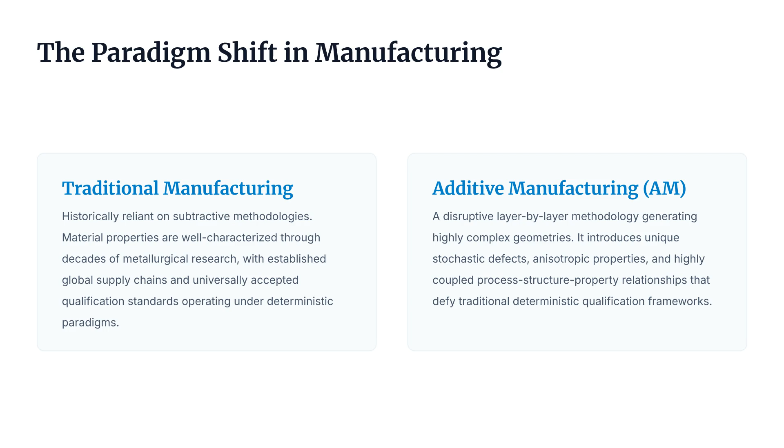In this first section, we provide an overview of the ecosystem and explore why establishing standardized pathways for additive manufacturing is an absolute imperative. Manufacturing is shifting. While traditional methods rely on well-characterized materials and deterministic standards, additive manufacturing introduces unique complexities like anisotropic properties and stochastic defects that defy conventional qualification frameworks.

Why do standards matter? They provide a common lexicon for global collaboration, act as a critical tool for risk mitigation, and serve as the foundation for regulatory compliance in sensitive industries. As the scientific consensus suggests, standards are not just guidelines. They are the essential bridge that transforms additive manufacturing from a laboratory novelty into a mature industrial reality.

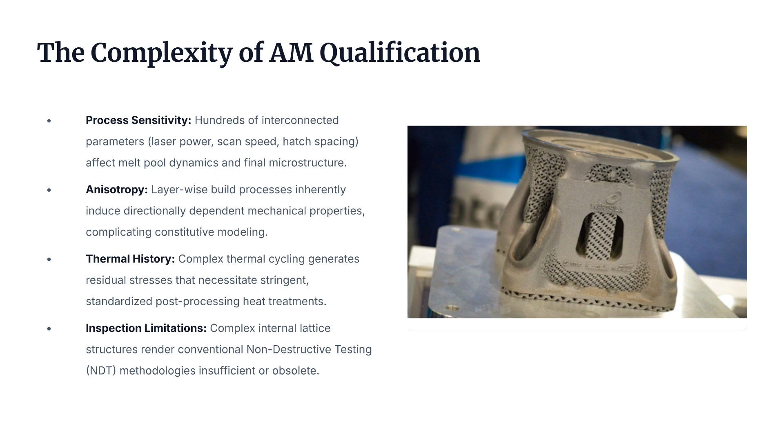Qualification in AM is complex. It involves managing process sensitivity, addressing anisotropic mechanical properties, navigating intricate thermal histories, and overcoming the limitations of current non-destructive testing methods. The evolution of these standards has been steady. From the formation of ASTM Committee F42 in 2009 and the establishment of ISO TC 261 in 2011, we now have over 100 active joint standards.

Moving to part 2 of this video, we will examine the core organizations that are drafting the critical blueprints for industrial additive manufacturing. ASTM International's F42 Committee is central to this effort. Since 2009, they have focused on technical standards for metals and polymers, driving integration into advanced supply chains.

ISO Technical Committee 261 maintains a global mandate. It operates through various working groups to cover everything from data formats to safety, ensuring international consensus across more than 170 member nations. The ISO ASTM Joint Framework is powered by a Partner Standards Developing Organization agreement.

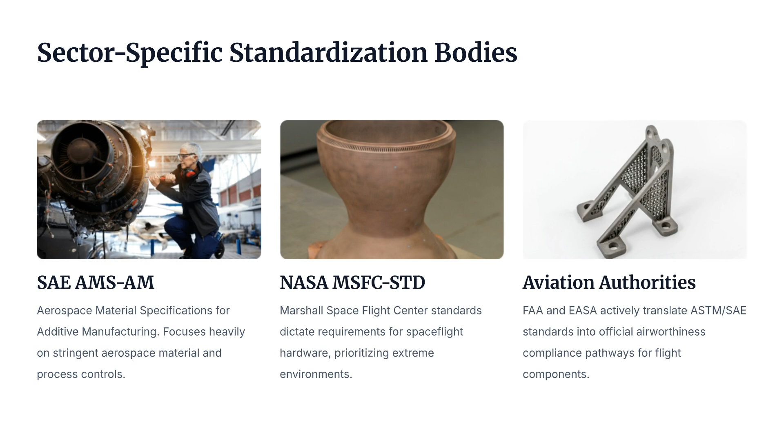This collaboration eliminates redundancy through joint groups that harmonize guidelines across the entire AM lifecycle. Beyond general standards, sector-specific bodies like SAE, NASA, and various aviation authorities translate these requirements into official compliance pathways for aerospace and spaceflight hardware. SAE International plays a vital role in mobility.

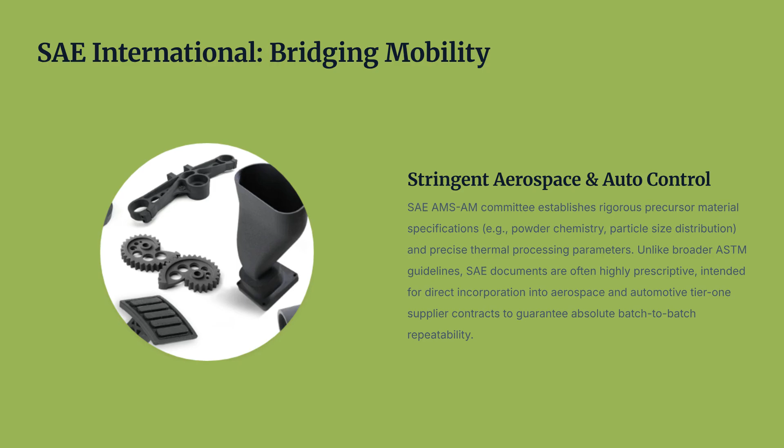Their AMS-AM committee provides highly prescriptive documents for aerospace and automotive suppliers, ensuring absolute repeatability in manufacturing. NIST, the National Institute of Standards and Technology, drives measurement science. They focus on metrology, in-situ monitoring, and robust data repositories to validate computational models and industry standards.

Finally, NASA Standards 3716 and 3717 provide critical requirements for spaceflight hardware, detailing rigorous part classification and process qualification to ensure safety in extreme environments.

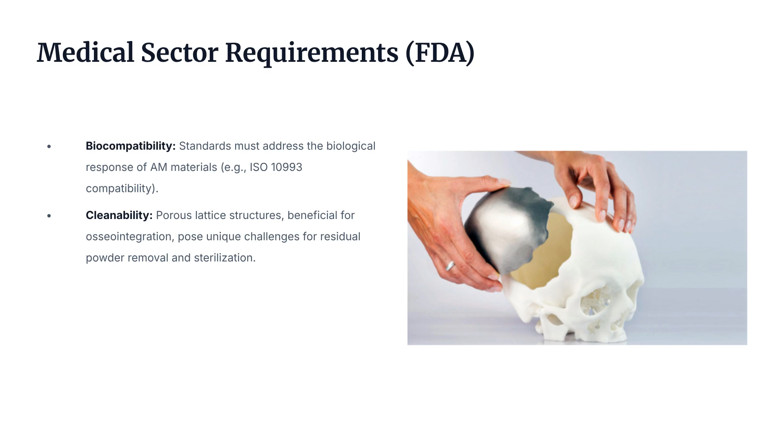In the medical sector, the FDA mandates specific focus areas for additive manufacturing. Key requirements include rigorous biocompatibility testing of materials, ensuring structures can be effectively cleaned and sterilized, and managing the unique challenges of patient-matched anatomical devices.

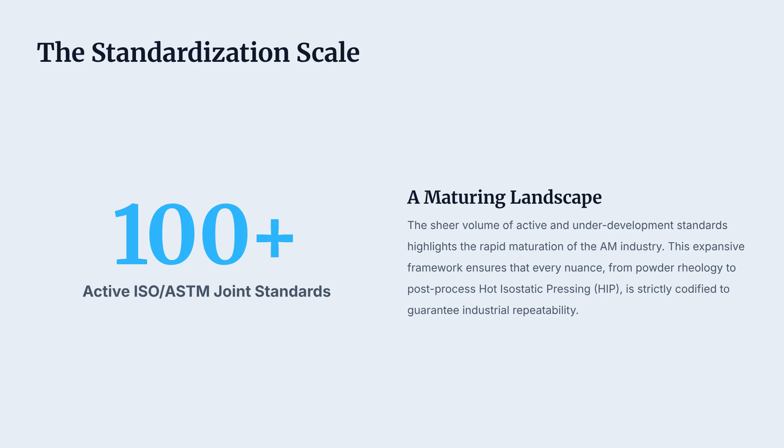The industry's growth is reflected in the scale of standardization. With over 100 active joint ISO and ASTM standards, the landscape is rapidly maturing, covering everything from fundamental powder rheology to advanced post-processing techniques like hot isostatic pressing.

We will now deconstruct the additive manufacturing standards framework by categorizing them. These categories provide structure to the expansive list of technical documents governing the field. The first two categories are terminology and design. Terminology establishes a universal vocabulary to prevent miscommunications, while design guidelines focus on design for additive manufacturing, or DFAM, including topology optimization and digital product definitions.

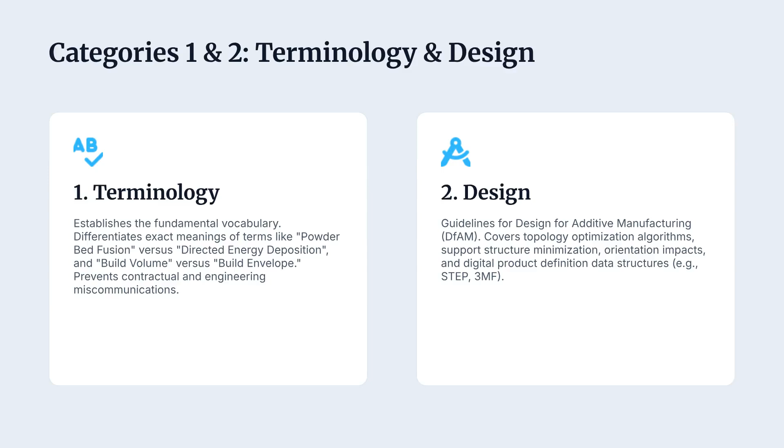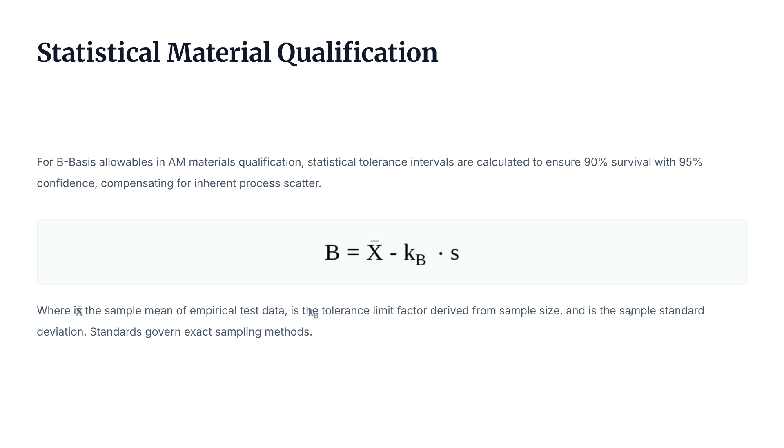Statistical material qualification is another pillar. For B-basis allowables, standards define how to calculate tolerance intervals to ensure high survival rates with statistical confidence, compensating for the inherent process scatter found in additive systems.

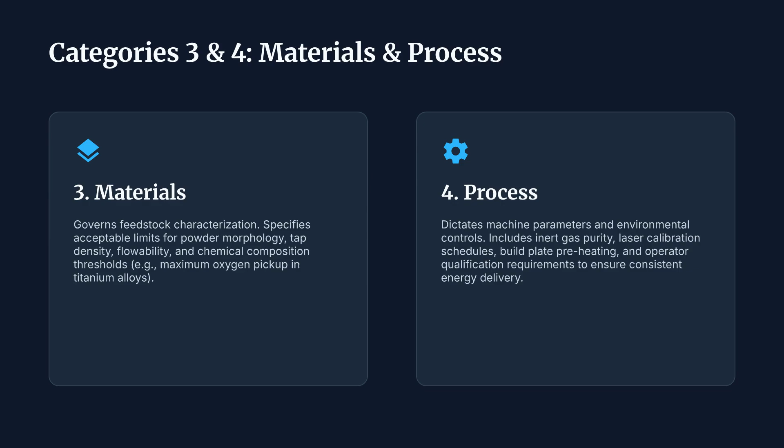Categories 3 and 4 cover materials and processes. Material standards govern feedstock characterization, while process standards dictate strict machine parameters and environmental controls to ensure consistent and repeatable energy delivery. The digital thread acts as the connective tissue for these categories. It ensures seamless data provenance from the initial design through material tracking, machine logs, and final inspection, while increasingly addressing vital cybersecurity requirements.

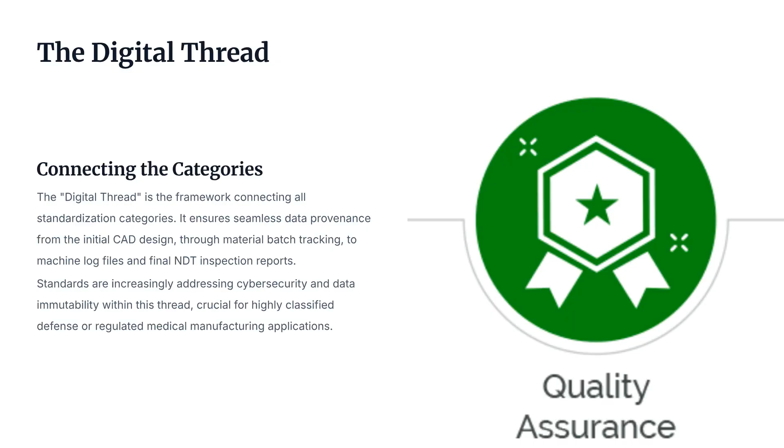Feedstock characterization is crucial. Standards regulate powder flow properties to prevent mechanical failures and establish strict recycling protocols to manage the chemical degradation of materials over repeated build cycles.

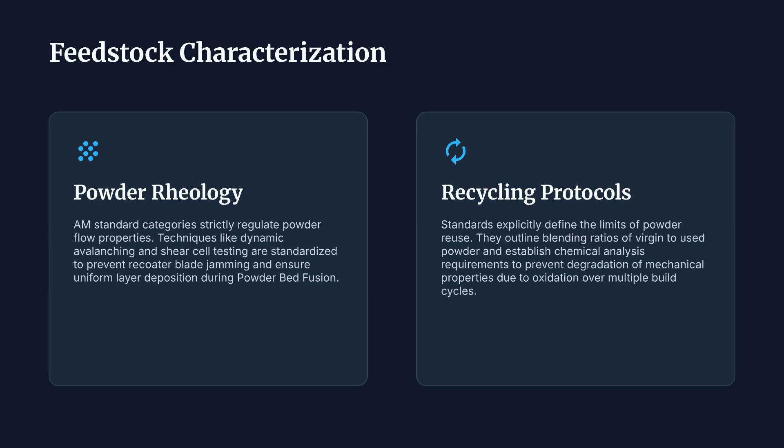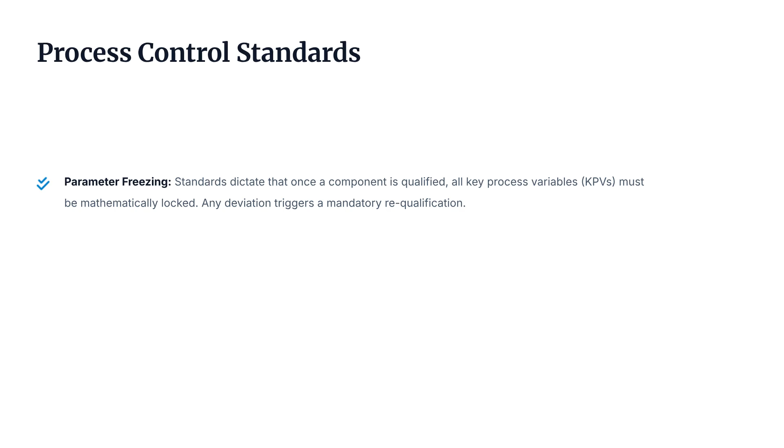Process control standards are equally vital. These include freezing parameters after qualification, requiring mandatory stress relief heat treatments, and maintaining immutable machine logs of anomalies for future root cause analysis. The fifth category involves testing methodologies.

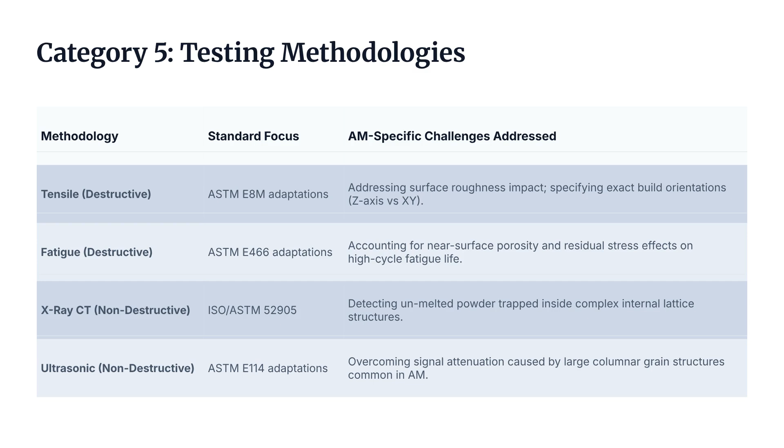These standards provide the consistent, standardized approaches needed to verify parts and materials across different additive manufacturing platforms. Global adoption of these standards varies by sector. Aerospace and medical industries have led the way due to strict regulatory requirements, but other sectors are rapidly adopting these frameworks as additive manufacturing scales.

In the final part of our video, we will examine several foundational ISO and ASTM documents that serve as the bedrock of the current additive manufacturing landscape.

ISO ASTM 52900 is the universal dictionary of the industry. It defines the 7 core process categories of additive manufacturing, providing the legal and contractual clarity necessary for global business and intellectual property. ISO ASTM 52910 outlines the general framework for design.

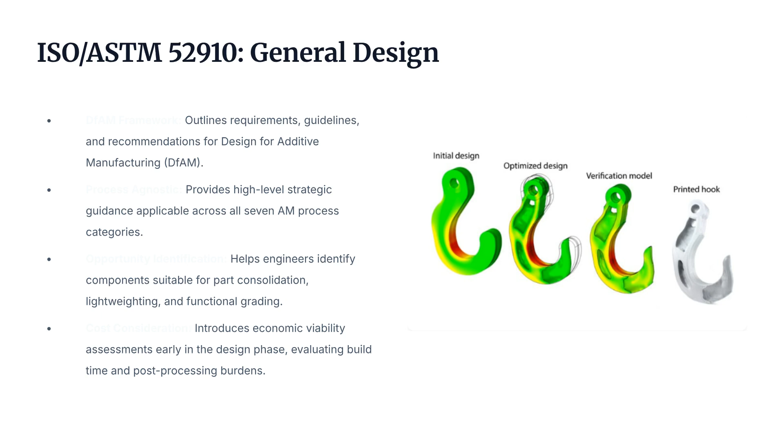It provides process-agnostic guidance to help engineers identify opportunities for part consolidation, lightweighting, and early-stage cost evaluation. Finally, ISO ASTM 52911 focuses specifically on powder bed fusion. It details technical design constraints like managing support structures, evacuating trapped powder, and minimizing thermal warpage to ensure high-quality, repeatable outputs.

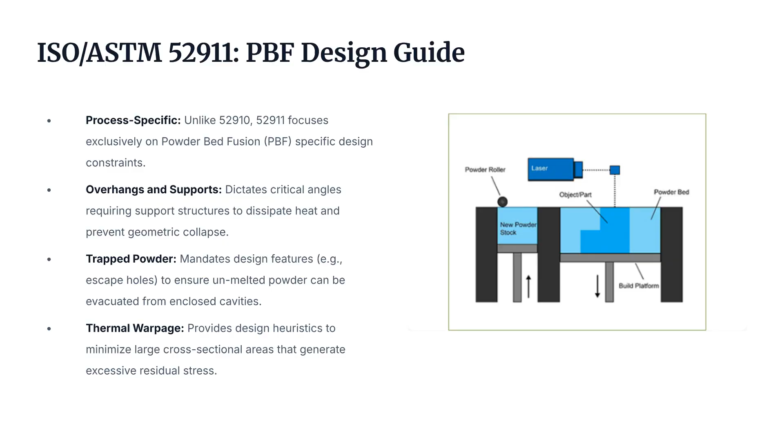Next, we look at ISO ASTM 52921, which defines coordinate systems. This standard is essential for standardizing the orientation of parts within the build volume, ensuring uniformity relative to machine architecture.

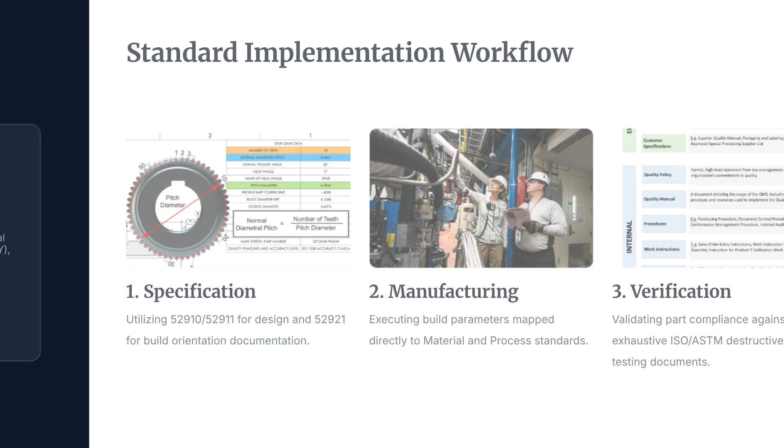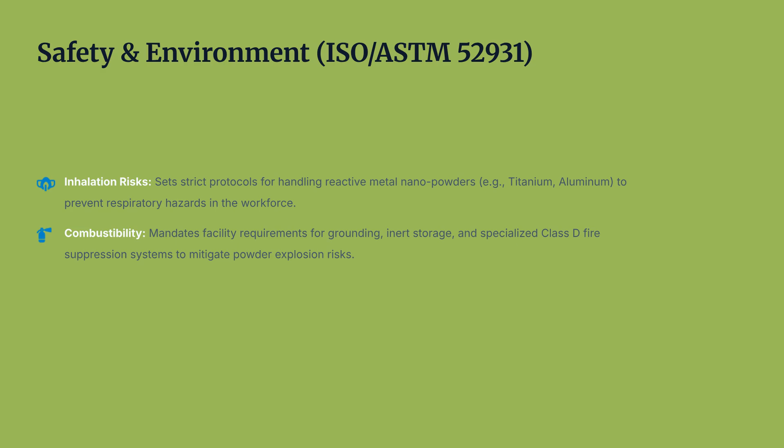The implementation workflow for these standards follows a 3-step process: formal specification, controlled manufacturing execution, and rigorous verification through testing and documentation. When dealing with metal powders, safety is paramount. ISO ASTM 52931 provides the necessary protocols to mitigate risks related to inhalation hazards, combustibility, and proper hazardous waste disposal.

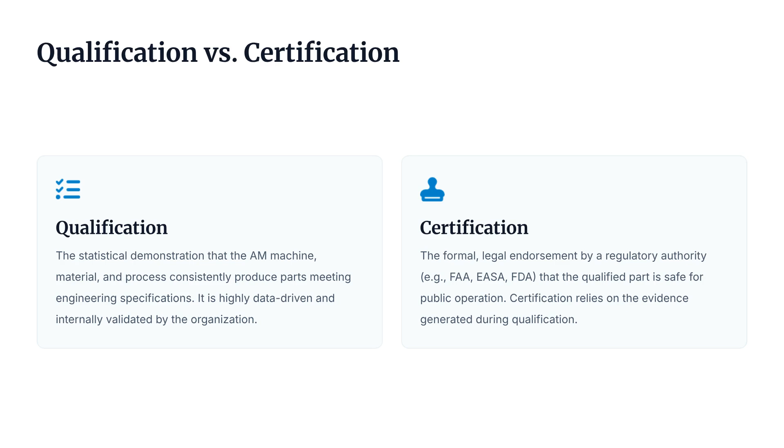This joint framework is powerful. As industry leaders note, it successfully harmonizes the digital definition of a product with its final physical manifestation, which is essential for industrial-scale manufacturing. Now, we explore qualification and certification, the final hurdles to achieving airworthiness and securing regulatory approval for high-consequence parts.

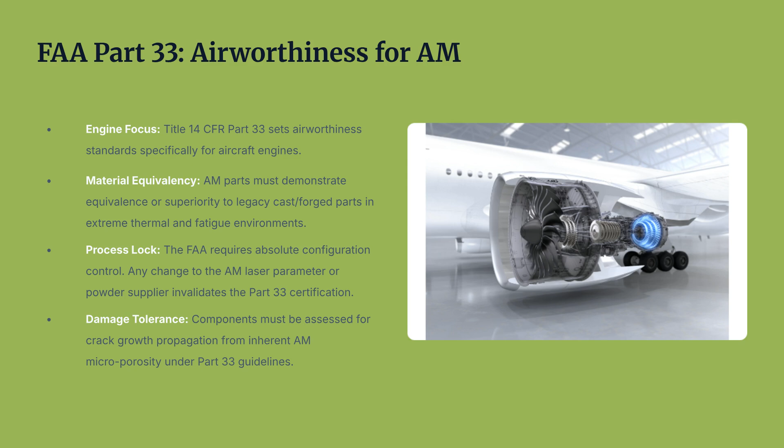While often conflated, they are distinct processes. Qualification is the internal, data-driven validation that a process consistently meets specifications. Certification is the formal legal endorsement granted by regulatory authorities like the FAA or EASA.

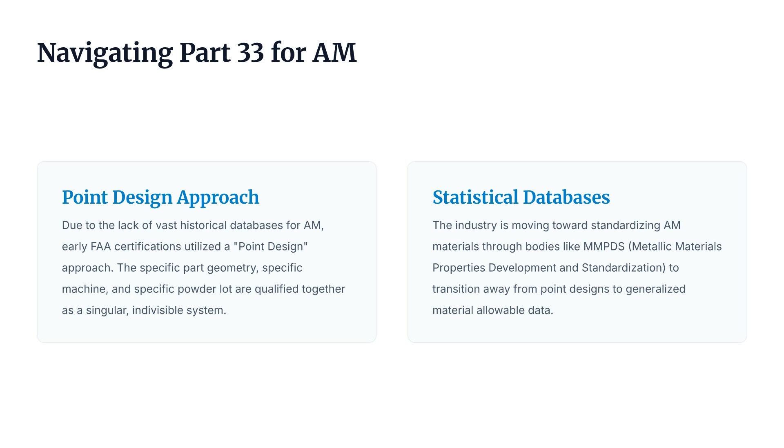For aerospace engines, the FAA's Part 33 governs airworthiness. It requires demonstrating that additive parts are equivalent or superior to legacy counterparts in extreme fatigue and thermal environments.

2 key strategies define the certification of these parts: the point design approach, which treats a specific machine and geometry as an indivisible system, and the shift toward generalized statistical databases.

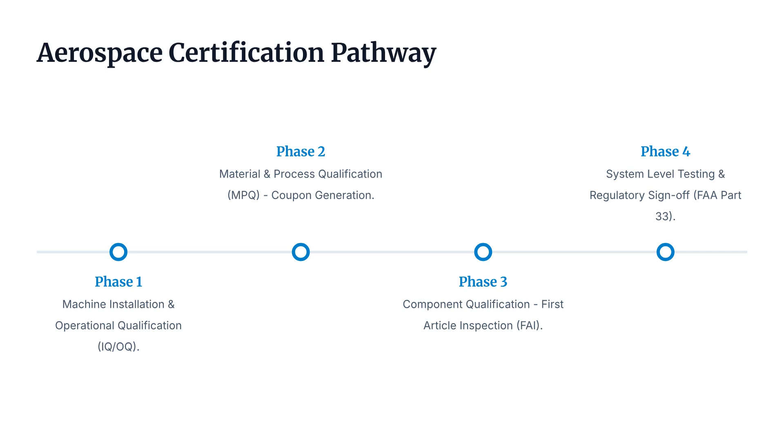To achieve compliance, companies must submit a detailed plan, conduct extensive coupon testing for baseline properties, and perform full-scale engine block testing to simulate real-world service conditions.

The aerospace certification pathway is a 4-phase journey, starting with machine qualification, moving to material and process development, transitioning to component-level inspection, and concluding with final system regulatory sign-off.

However, entering this space requires overcoming significant hurdles. It typically demands 3 to 5 years of dedicated R&D and millions of dollars in capital investment to prove reliability.

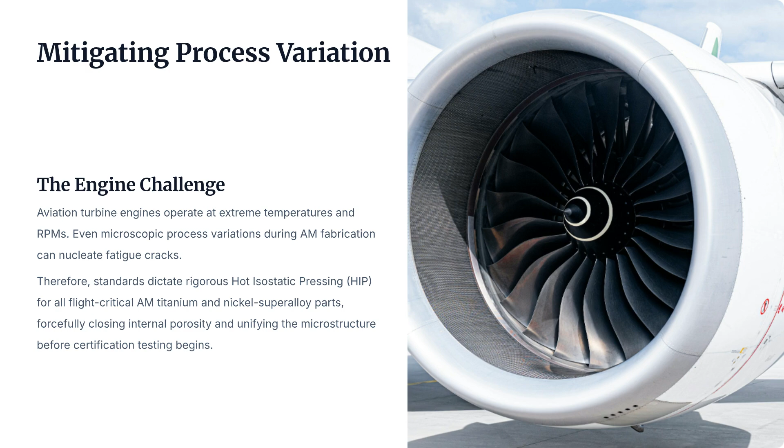Mitigating process variation remains a constant challenge. Consequently, standards often mandate post-processing steps like hot isostatic pressing to ensure consistent microstructure and eliminate internal porosity in flight-critical parts.

To succeed, many organizations rely on industrial alliances. These research institutes, user groups, and public-private partnerships accelerate technology transfer and share best practices across the global manufacturing landscape.

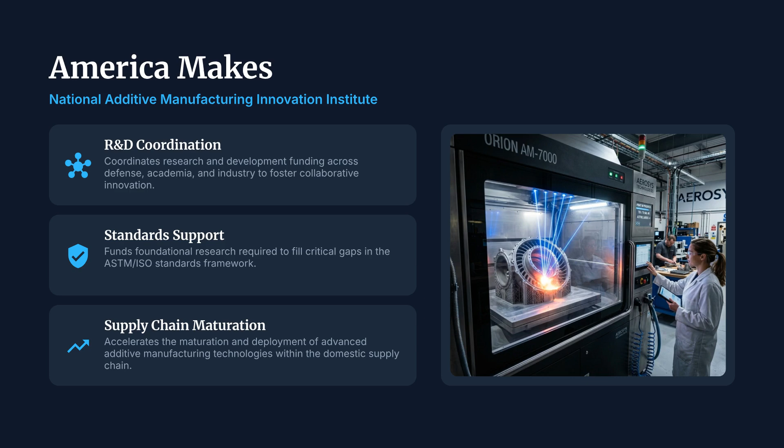A prime example is America Makes, the National Additive Manufacturing Innovation Institute. They coordinate R&D funding, support foundational standards development, and drive the overall maturation of the domestic supply chain.